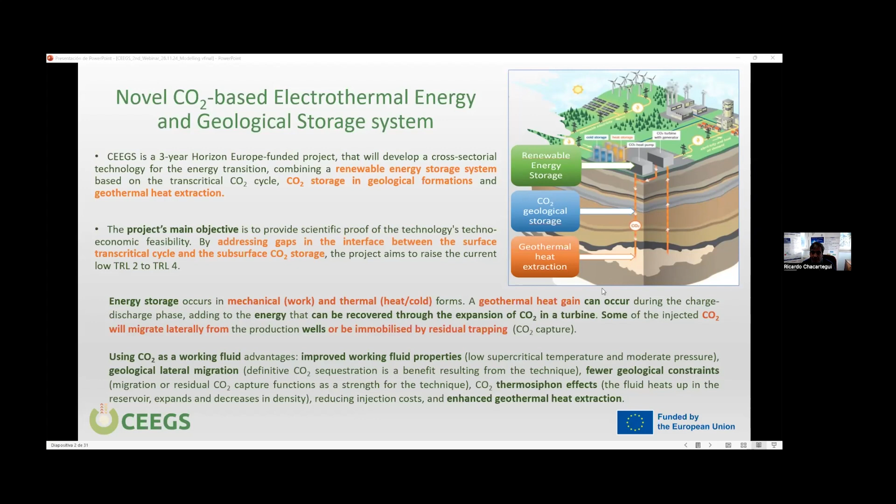The main advantages are related to the very good characteristics of CO2 as working fluid, the capacity of partial sequestration of the CO2 in the terrain, an additional benefit of using captured CO2, and the thermodynamic characteristics of CO2 can also provide benefits regarding CO2 thermosiphon effects, reducing injection costs and big advantages regarding enhanced geothermal heat extraction. Next slide, please.

Our goal in this project is to demonstrate the feasibility of the concept. We are studying different layouts, different integration, and analyzing the different components at this early stage technology. We are not developing the final design of the heat exchangers or turbomachinery, but analyzing if under the proposed cycles there are feasible turbines, compressors and heat exchangers that can be constructed, operated and integrated in the final idea. We are doing this analysis through modeling, which is the objective of today's webinar.

Our focus in the project is the interface between the surface components and the subsurface. It's a novel concept that integrates thermoelectric energy storage based on reversible transcritical CO2 cycles, with the potential for geological CO2 storage. It's a scalable system with high performance, high capacity energy storage, as demonstrated in the previous 2 years of the project. The concept minimizes cost and surface impact and increases the energy storage capacity compared to the Carnot battery without the geological side.

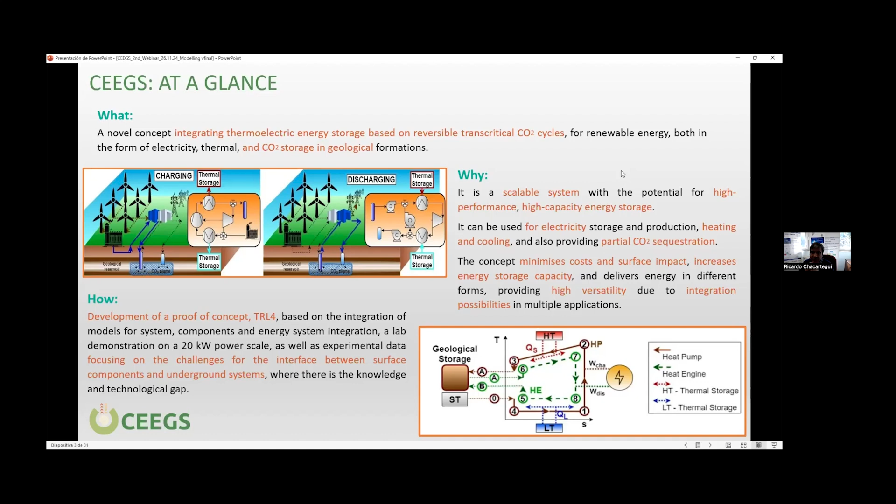Now we are finalizing the second year, so we have 1 year ahead. At this stage, we can say that all the concepts and all the analysis that we have done show that the concept is feasible and viable, and high efficiencies are expected, higher than the Carnot battery standalone. We are having very interesting results with novel designs of the concept and showing the feasibility of the components that

are integrated. We expect to have in the future a second project to increase the technology readiness level towards commercialization. Okay, that's all from my side.

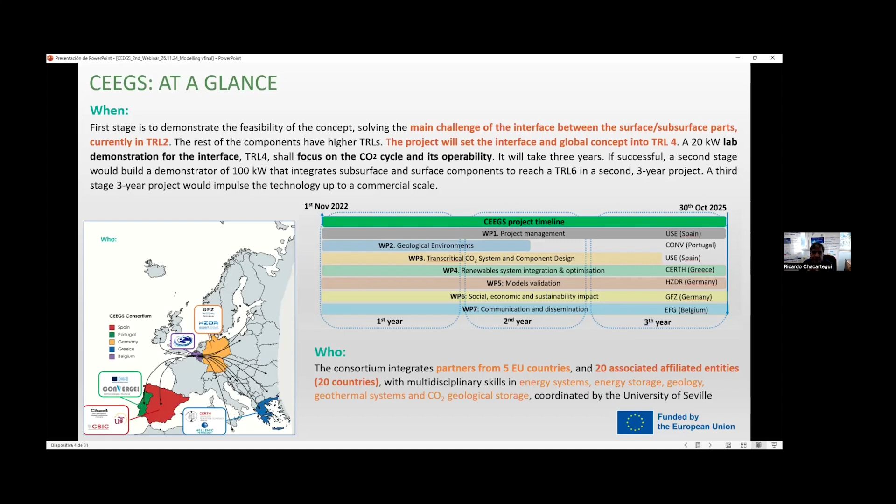Okay, so no, sorry, not all, I forgot. Which are the expected results and impact that we have in this project? We have 3 main blocks regarding the challenges. A challenge regarding the integration of surface and subsurface components into a system. A challenge related to the conceptual design of novel components adapted to the requirements of the cycle.

And the third big block challenge is the techno-economic feasibility and related impacts. It also includes the social acceptability and acceptance of the technology. And that's all from my side.

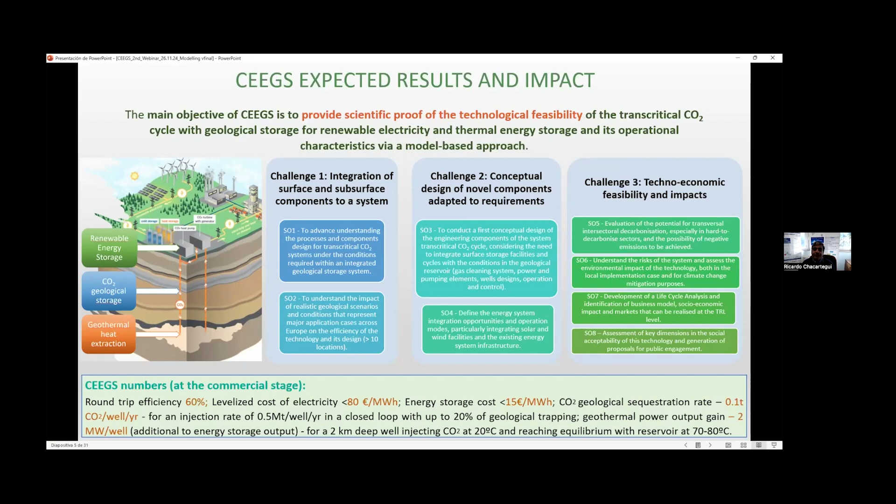Thank you. Now, Andres, I give the room to you. Ricardo, thank you very much for this short overview of the project. Before I pass it on to Andres, I would just like to shortly introduce him because he's also quite an excellent expert in geothermal modeling.

Andres studied industrial engineering and concluded his bachelor's 5 years ago, and just last year received his PhD in energy, chemical, and environmental engineering at the University of Seville. He's also currently employed there, working as a research and development engineer in thermal engines and machines in the group that Ricardo is leading, in the Department of Energy Engineering at the same university.

His main research contributions focus on sustainable energy storage using systems based on abundant and sustainable materials. He is actually the reason why we are all here, because he was the first author of the first publication in this field that we are researching further with CEEGS. Let's say that he's one of the fathers of the CEEGS project. So thank you for that, Andres.

And the next several minutes are yours. Please dive us into the numerical modeling of the CEEGS system. Please. Okay, thank you, Marco, for the presentation. I'm going to present now the first part of the numerical modeling.

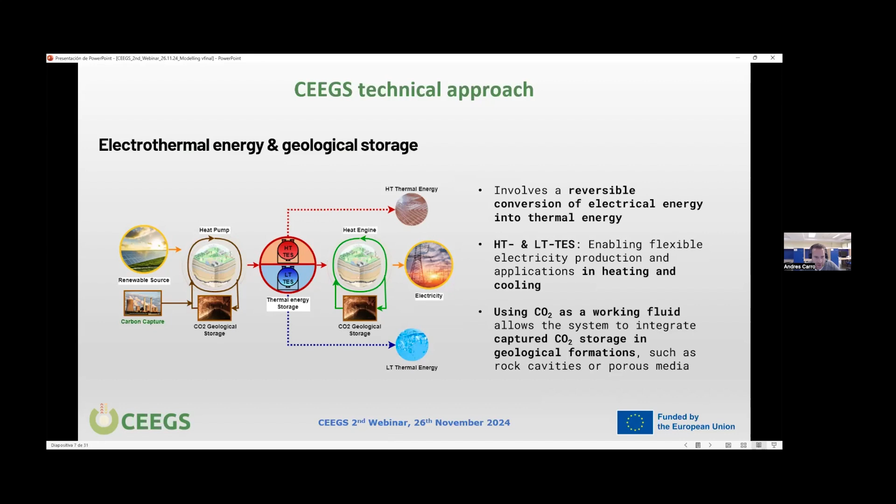In addition, using CO2 as the working fluid in the energy conversion cycle allows the integration of carbon capture and storage processes. The technology employs transcritical CO2 cycles in thermal energy conversion processes. Both the heat pump cycle and the power production cycle involve a compression and expansion process, heating or cooling under supercritical conditions, and a phase change.

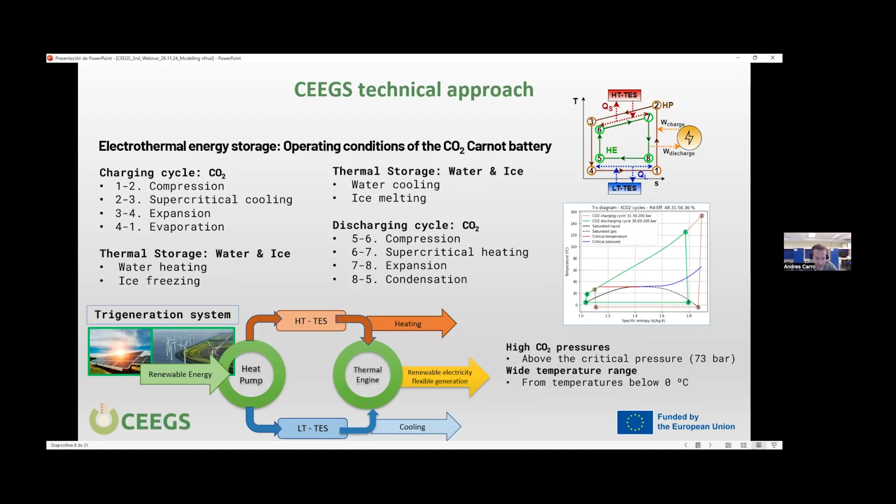The high temperature thermal energy storage system is integrated by sensible heat transfer with heating or cooling of CO2 under supercritical conditions. The temperature range of the CO2 in supercritical conditions allows for the use of hot water as a high temperature thermal storage system. The low temperature thermal energy storage is integrated by latent heat transfer in the CO2 phase change. The CO2 phase change enables the integration of the water to ice phase change as a low temperature thermal storage system.

These conditions of CO2 availability at high pressure levels and relatively low temperatures allow for the integration of geological CO2 storage processes. When considering CO2 capture, transport and storage processes, high pressure and low temperature conditions are compatible with both the supercritical transport and the pressure and temperature requirements for geological injection at the wellhead. Using the CEEGS system, CO2 can be conditioned for injection into underground geological formations without the need for additional energy input.

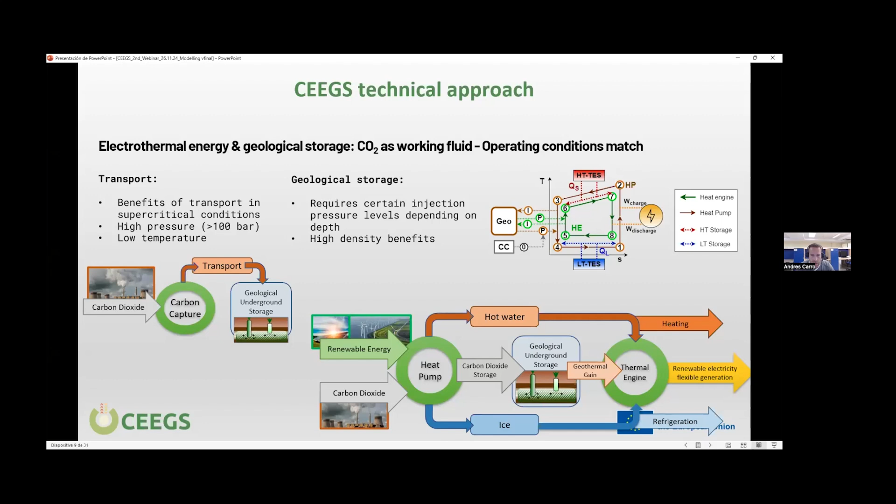The modeling of the system will depend on the processes shown below: a charging and discharging phase, each associated with a transcritical CO2 cycle and heat transfer to high and low temperature thermal storage, and the integration of the geological process of CO2 production and injection from the underground reservoir. By integrating the geological processes into the renewable energy storage system, additional benefits are incorporated, such as a geothermal gain, the lateral migration, or the residual trapping of CO2, causing a portion of the stored CO2 to become permanently fixed.

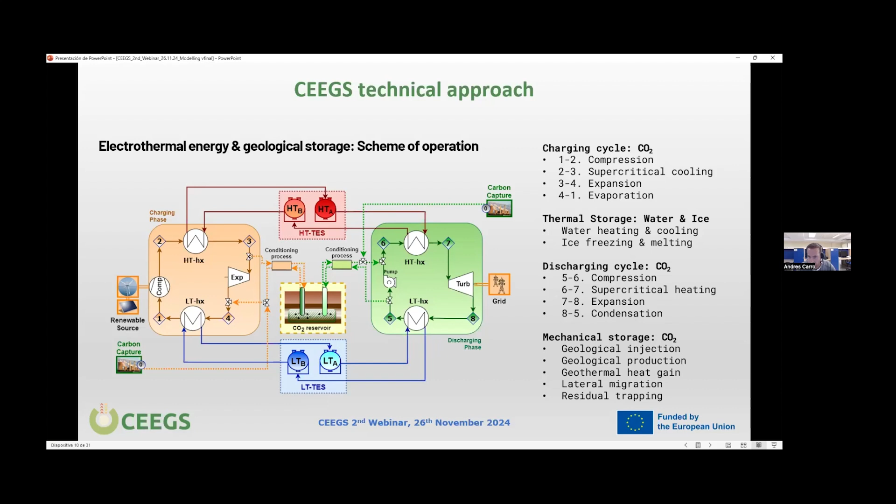The processes involved in energy conversion depend on the modeling parameters shown in the table. Low temperature thermal storage depends on the phase change temperature. The temperature range of high temperature thermal storage depends on the output conditions of the charging phase compressor and the discharging phase pump, which depend on the CO2 pressure on the high temperature side. The power equipment is modeled from the isentropic performance of the equipment. In addition, compressor and turbine curves have been introduced in the modeling of part load operation, as well as a step heat transfer at the heat exchangers.

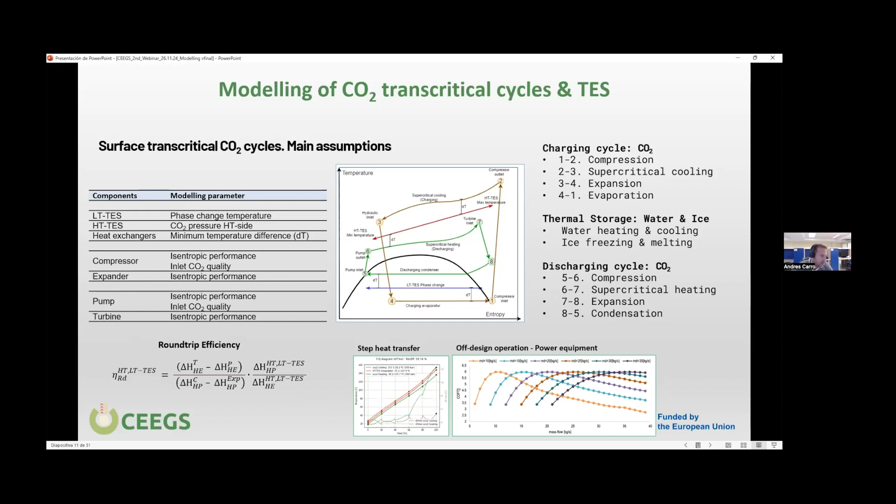The round-trip efficiency of the system is calculated considering that all energy stored during the charging is used for discharging, so that the indicator only depends on the enthalpy drops in the main equipment involved in the CO2 transcritical cycles. The good integration of the temperature profiles in the heat exchange is essential to achieve a high system efficiency.

In the case of low temperature thermal storage, the phase change temperature is conditioning the CO2 evaporation and condensation processes. Evaporation in the charging phase has to be at a lower temperature than the phase change, while condensation in the discharging phase has to be at higher temperature. The CO2 condensation process has to be at a pressure higher than the evaporation pressure.

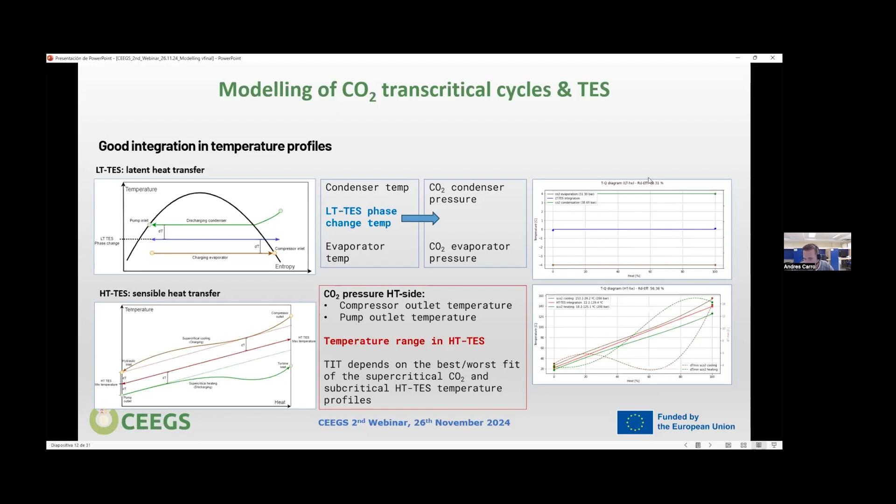In the case of the high temperature thermal storage, the temperature range is conditioned by the outlet conditions of the compressor equipment. The compressor outlet temperature is the highest temperature of the system, so the turbine inlet temperature will depend on this value and on the better or worse integration of the temperature profiles between the supercritical CO2 cycles and the thermal storage.

In terms of modeling the geological processes, the conditions in the reservoir depend on the type of reservoir, rock cavities or porous media. The depth of the reservoir and the ground conditions, such as the geothermal gradient, are conditioning the CO2 in the reservoir. CO2 injection and production processes are modeled using the adapted salt cavity model of Khaledi et al. and the wellbore flow model of Adams et al. This incorporates the simulation of heat transfer and pressure evolution, dividing the well into segments, which depends on several parameters such as diameter, depth, ground temperature, wellbore materials, or pressure losses.

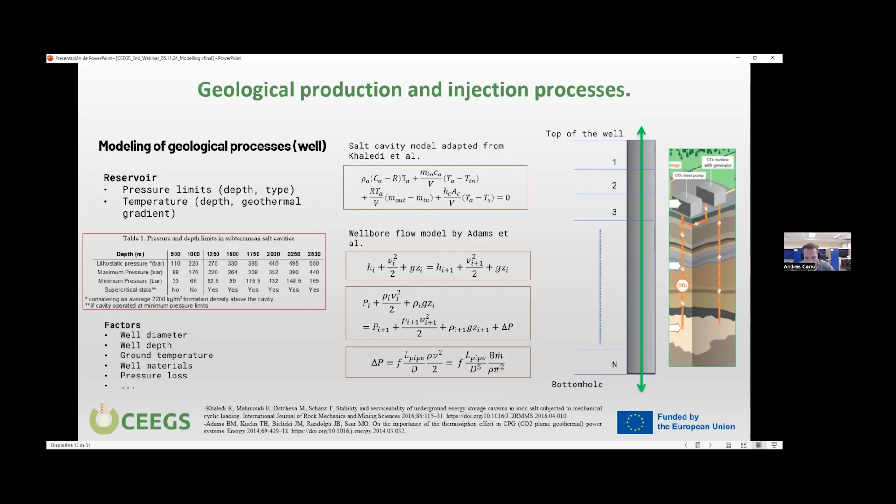The numerical model offers a multitude of results and a wider range of analysis: the optimized coupling of phase change on the low temperature side, and optimized integration of the CO2 cooling and subcritical water heating and cooling. The heating and cooling applications have been analyzed, considering multi-stage heating and cooling or the phase change temperature management. An evaluation of the CO2 pressure range that maximizes the efficiency has been performed, the evaluation of pressure and temperature conditions in the carbon dioxide injection and production, or more detailed studies, such as the preliminary evaluation of seasonal energy and CO2 geological storage, or different configurations of the cycle, adding multi-stage compression, heat recovery, or reheating.

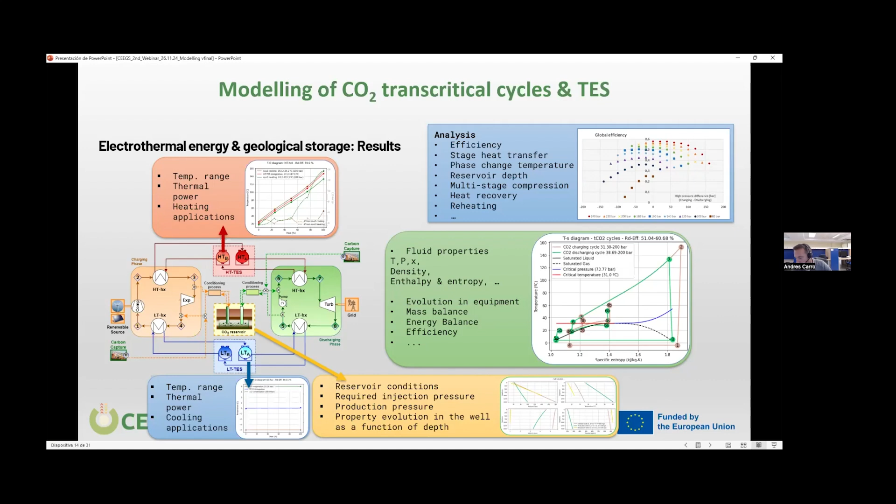As conclusions of this part, the numerical modeling allows the feasibility of the technology to be demonstrated both globally and at the component level. At an early stage of design, the feasibility of integrating the proposed concept is demonstrated. The numerical modeling shows that under certain conditions, heat exchanges are feasible, the evolution of the processes in the power equipment is consistent, and there are possible configurations for the charging and discharging phase, as well as for the integration of components, achieving a high efficiency of over 60%.

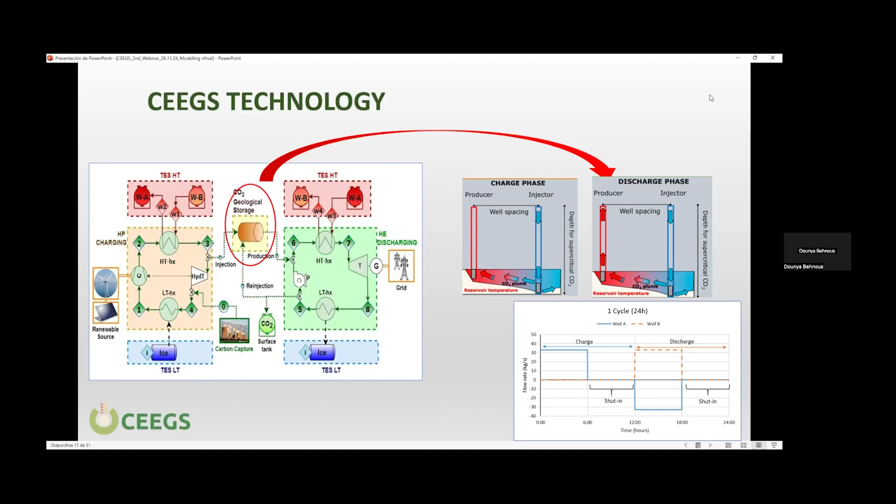However, in this presentation, we will show a case study of the porous media, which is the deep saline aquifer. This scenario presents several advantages, mainly that it is a very good candidate to manage pressure in the subsurface and underground, unlike closed boundary aquifers, which usually lead to bottom hole pressure that can increase during plume buildup, potentially causing fractures and breaking the cap rock.

Additionally, compared to the depleted reservoir field, the open boundary saline aquifer has further advantages, because depleted hydrocarbon fields are known to contain residual hydrocarbons or natural gas, which can contaminate the CO2 plume and pose a challenge to surface facilities that are not typically designed to handle such flammable gas.

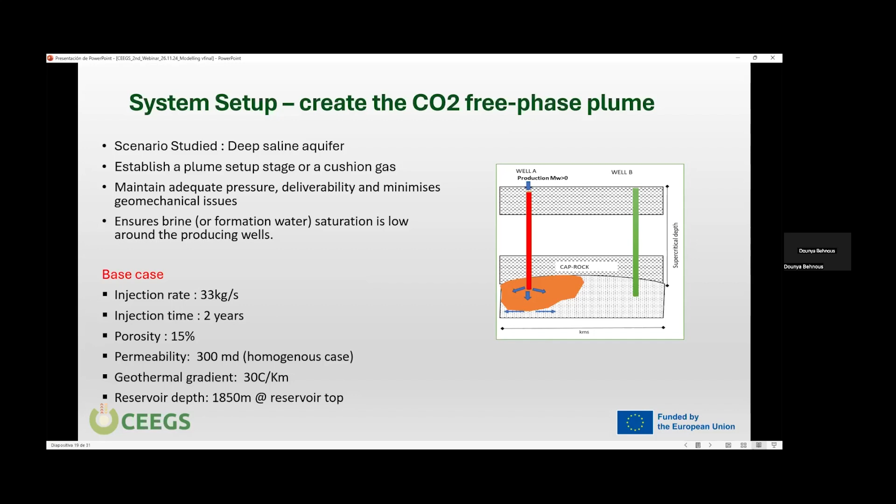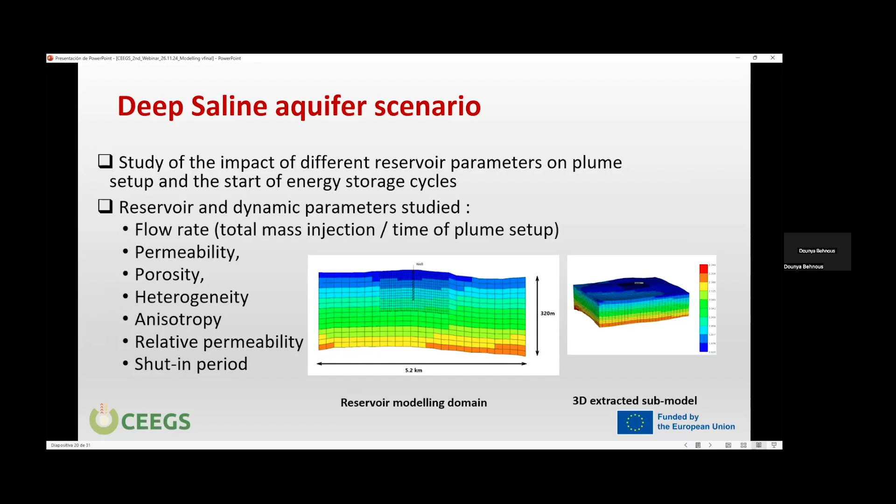So we have studied some parameters such as the flow rate, the permeability, the porosity, heterogeneity, anisotropy, relative permeability, and shut-in period. I will present some results of 2 or 3 parameters that are mainly important for our output, such as the gas saturation and the water rate production.

Since we know that water is the main impurity that compromises the CO2 purity at the wellhead, and due to the presence of residual water near the well, some water will be co-produced. Here we have a simulation for the effect of CO2 injection rate on the gas saturation and the water rate. We did simulation over 3 parts of the interval perforation: the top of the reservoir, the 2/3, and the full length of the perforation.

We can see that as the CO2 injection rate raises, the gas saturation increases, which will decrease water production during extraction. However, a peak saturation of approximately 76% of gas saturation for a porosity of 5%, and this saturation level does not increase further due to the presence of irreducible water in the reservoir.

Also, under anisotropic conditions, the gas saturation in the top third of the wellbore is slightly lower than it would be under isotropic conditions. This also contributes to an increase in the water production rate in the well that is back produced for the CO2.

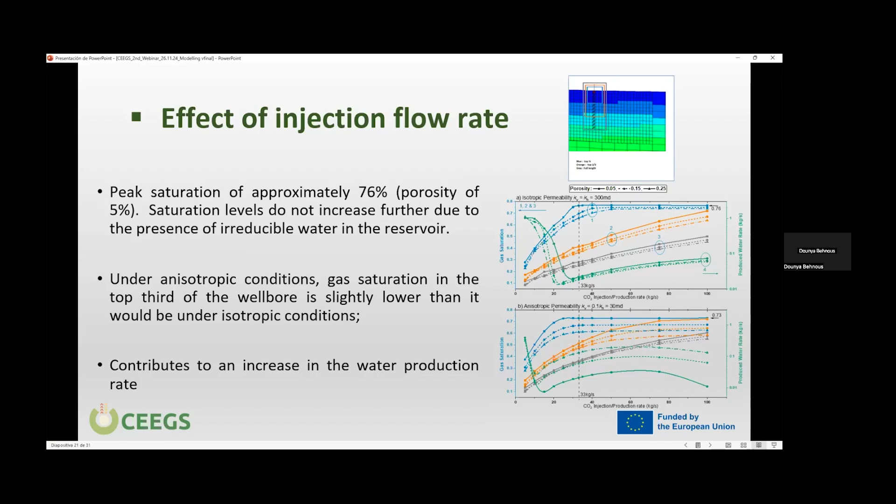The second effect is the porosity and permeability effect on the two main parameters: the horizontal permeability and the vertical, which is the ratio of vertical to horizontal permeability, and porosity. We know that permeability governs the flow of the supercritical CO2 in the reservoir.

The increase or the ratio of the permeability will influence the water production rate during extraction. As expected, the minimum water rate corresponds to a maximum gas saturation. Also, for porosity, it tends to have an inverse relationship with gas saturation—such low porosity enhances gas saturation.

Also, we can conclude from this result that we can establish a range for the permeability so that the minimum water rate is produced with the maximum gas saturation for practical application. The last parameter that we are showing here in the study is the effect of heterogeneity.

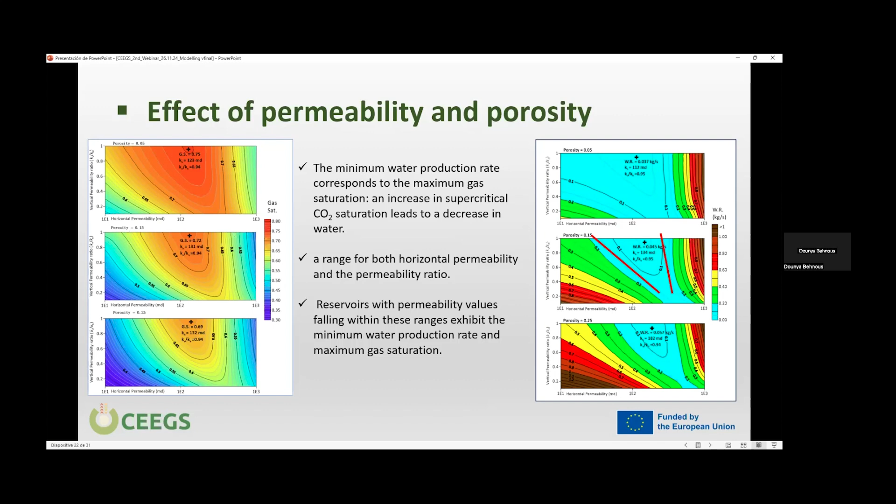It is the parameter that severely affects the shape and the behavior of the CO2 plume during injection. To quantify this effect or the degree of heterogeneity, we have used the coefficient of variation, which is a metric to evaluate heterogeneity, measuring the relative variability of a data set in relation to its mean value. So we have some important outcomes regarding the effect of heterogeneous reservoirs.

A highly heterogeneous reservoir will show significantly lower saturation, with water production rate in the high heterogeneous case over 200 times greater than in a less heterogeneous reservoir.

Also, for reservoirs with coefficient of variation values less than or equal to 0.25, the gas saturation and water production remain relatively stable with minimum variation. Reservoirs with low heterogeneity experience a decline in gas saturation over time, which means we need to avoid a long shut-in period to avoid a decrease in gas saturation.

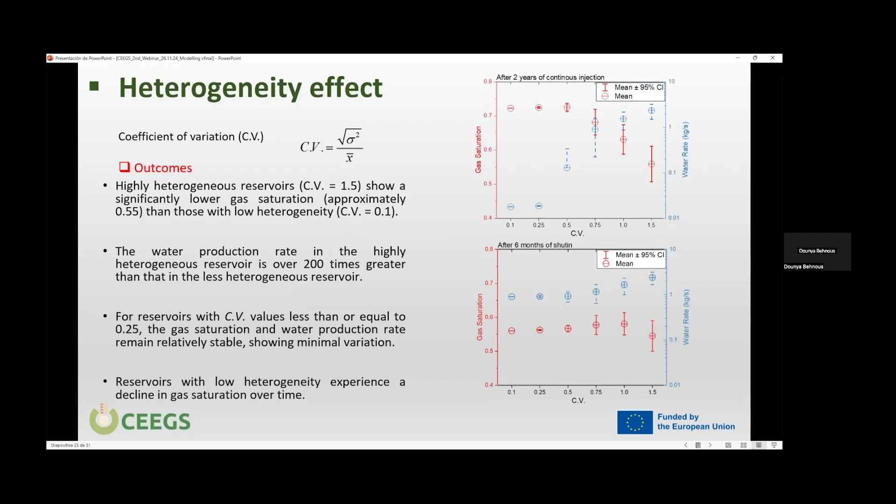As a conclusion for these main parameters that affect the performance of the subsurface reservoir regarding petrophysical properties of porosity and permeability: reservoirs with porosity ranging from 5 to 15% and permeability from 30 to 300 millidarcy are more adequate for the CEEGS concept, which is a variable that needs to be optimized for each specific reservoir. Another reservoir needs another study.

Isotropic reservoirs are always preferable, but the influence of anisotropy is less relevant when porosity is low. However, a high porosity value always negatively impacts gas saturation and water rate. So for a better candidate porous media scenario, it's better to look for a homogeneous reservoir with coefficient of variation less than

0.25, with the impact of permeability on gas saturation. However, for the case of heterogeneous reservoirs, this can be mitigated by the placement or position of the CO2 injection point closer to the top of the reservoir.

In this study, as an important outcome, and as noted by previous authors from other studies, it's preferable to have a gas saturation around 55% as a minimum saturation around the injection well to start the energy storage cycles. Thank you.

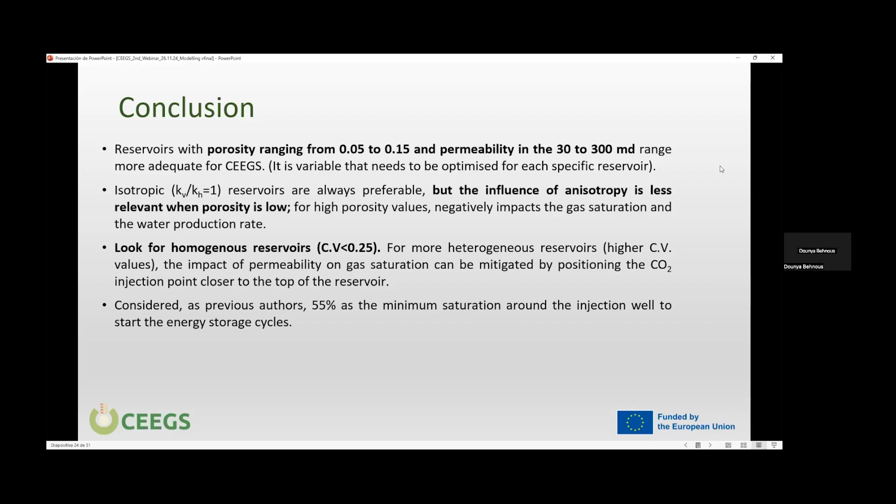Dounya, thanks for this. It was very interesting also to see how we can implement this in the real case scenarios underground, where the future lies, because we want to utilize or apply this technology all over Europe when it's developed well enough. So thanks again.

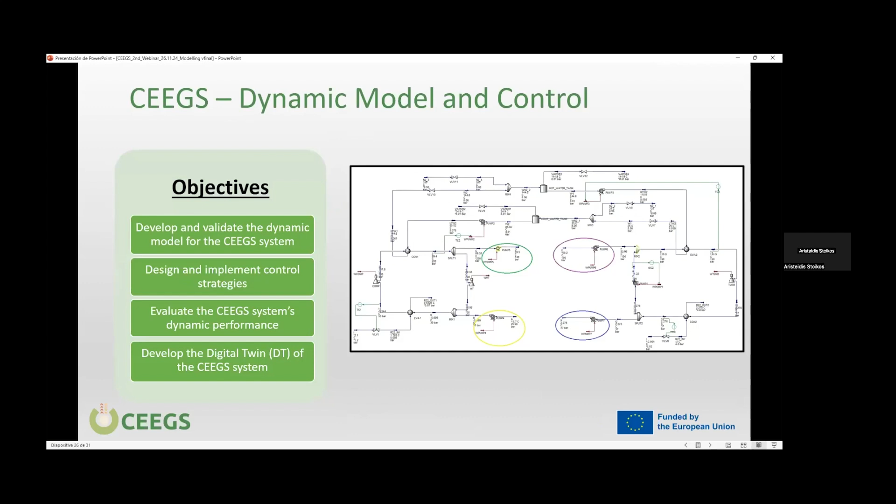So we have developed the dynamic model in Aspen HYSYS for a 1 megawatt capacity. We have been using an operating scenario where initially the charge cycle starts, the hot water tank fills in, and once that has been accomplished, the discharge cycle is activated until the hot water tank is depleted, and then the process starts all over again. This is a base case operating scenario that we have started with, and we have also been using 4 PI-PID controllers at 4 points to control specific temperatures.

Some initial results of this base case scenario: compared to a model without CO2 geological storage, there's improvement in the dissipated energy on the thermal energy storage tanks, and improvement on the overall round trip efficiency, as you can see on the table on the right.

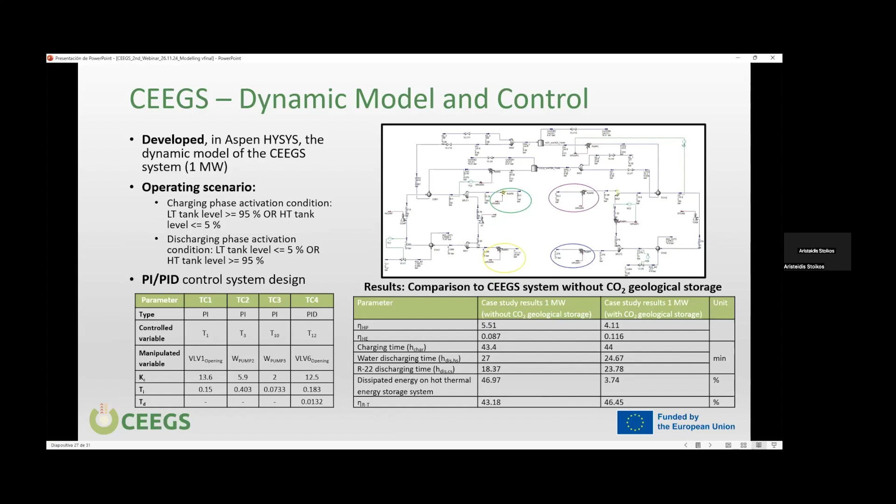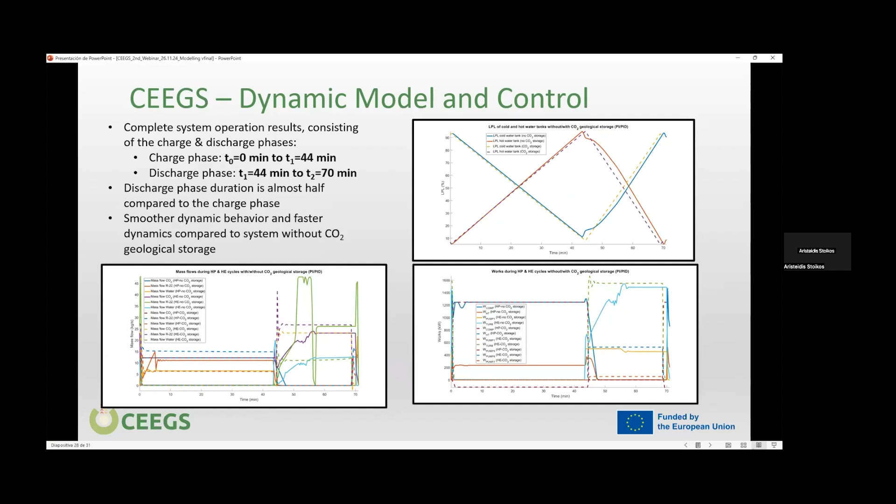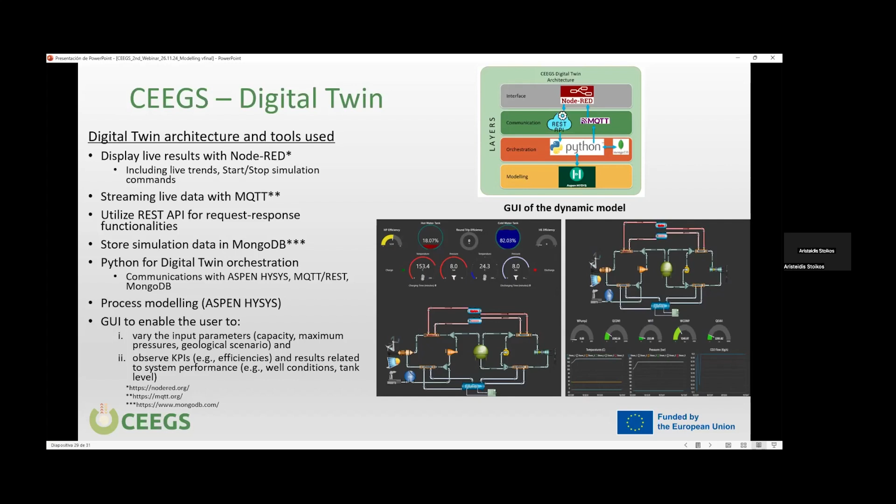To conclude, what the dynamic simulation of the system allows us is to evaluate the dynamic performance, different control algorithms, and system KPIs and critical parameters, while the digital twin allows us for the demonstration and visualization of the overall CEEGS process. In the future, we'll be working on different operating scenarios because, as I said, we have just worked on some initial base case scenarios, that will integrate different renewable energy systems production profiles, thermal energy storage utilization, and integration of different subsurface storage scenarios. We'll also be working on the dynamic optimization of the overall system to achieve the optimal integration of the different CEEGS subsystems and improve the overall system design.

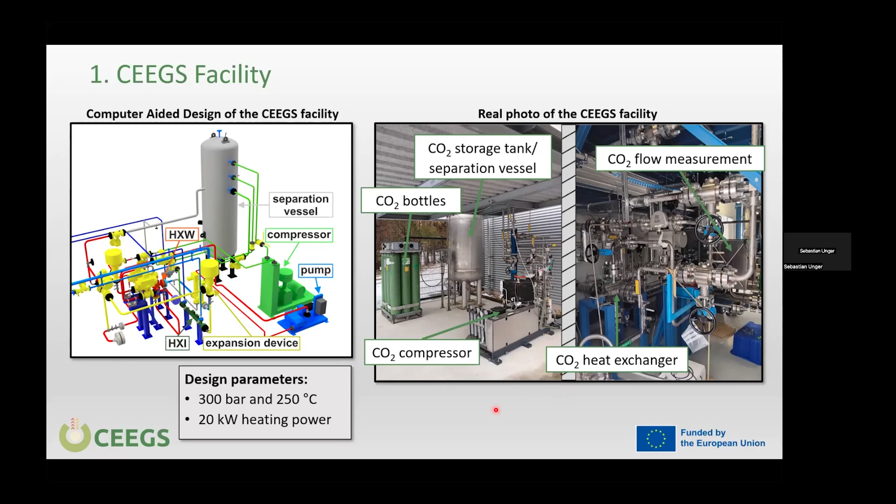Especially if we're having a huge volume of CO2 in the storage tank or separation vessel, it's better to have a bigger volume of CO2 on the outside in case of leakage. And of course, we fill up the system with CO2 bottles. There are also some measurement devices you can see in the background here, flow measurements. And the design is made for 300 bar and 250 degrees Celsius.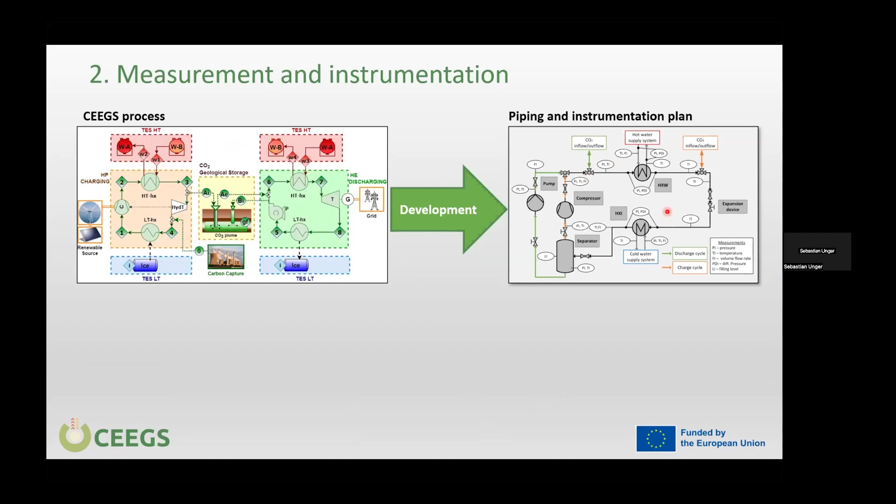So first of all, when you want to build up an experiment and want to determine which measurements you want to have, you look at this concept, which was presented by the partners before, and then you develop a piping and instrumentation plan, and then you determine where all the measurements are, temperature, pressure, and so on. After knowing how many and where to put them, you need to learn what is the reason to have it.

We want to measure temperature, pressures, mass flow rate, and quite often you need fluid properties of the CO2 in our case, and there are fluid or lookup tables. If you know temperature and pressure, then you can know viscosity, density, and other parameters. Then you can calculate the heat transfer, the power, pressure drop, and so on. In the end, you can determine the performance of your system and of individual components involved in the process.

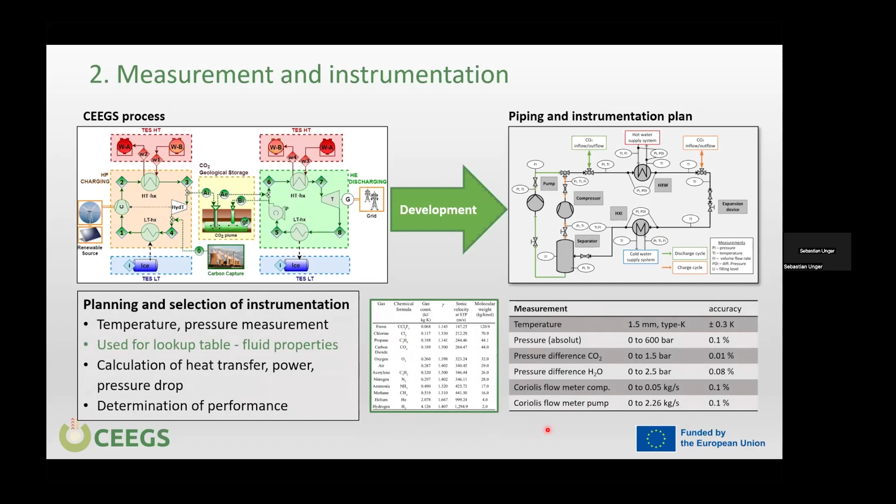Here's a small table of the measurements we take, and I will give you the examples in the next slides. The typical principle of how something is measured is shown here. So for example, you have a temperature sensor measuring a temperature here. You connect that one to a switch cabinet where all the measurements are taken. And then usually you give an electronic signal, usually 4 to 20 milliampere, to a process control system.

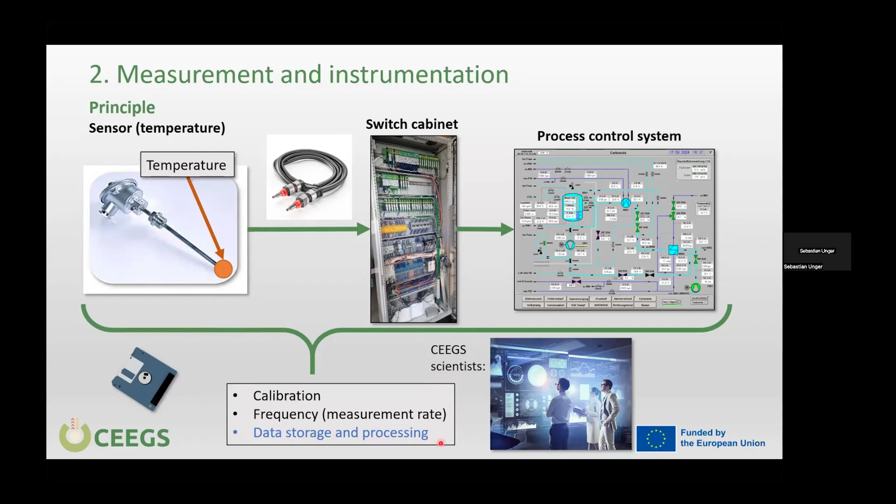There the whole process is controlled, valves are opened and closed. And before you can even measure something, you need to calibrate this whole measurement chain in order to have the correct results. You determine the frequency, so how fast you measure, one measurement per second, one measurement in 5 seconds, or 5 measurements in 1 second, and so on. And then you store and save the data. And in the end, we analyze and process the data, for example for model validation.

One of the most important key process parameters is temperature. Of course, also for safety, you don't want to have too high a temperature. There are many technologies, but two main technologies are used. One is the resistance thermometer. You know that maybe from physics at school, Ohm's law. So from the voltage and the current, you can know the resistance of a sensor. And depending on the material, each has different characteristics. For example, here's a nickel resistance temperature characteristic.

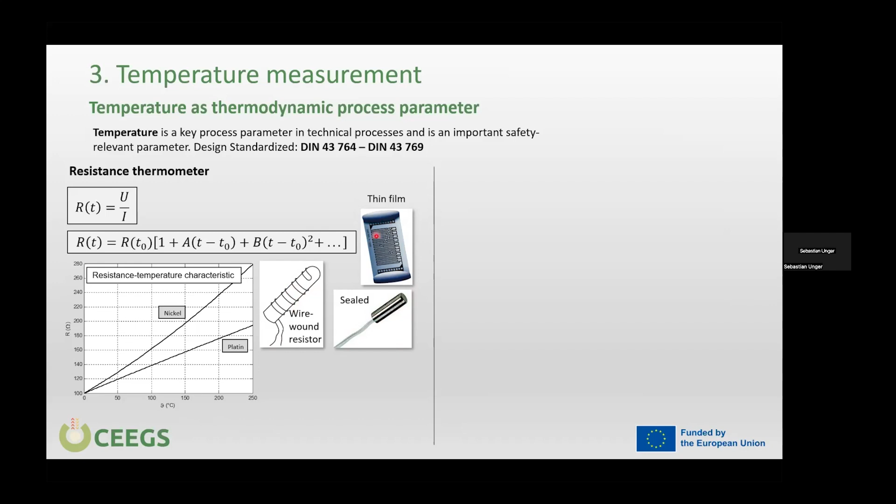So the higher the temperature of this element, the higher is the ohmic resistance, and you can measure that one. There are different designs. Usually there are wires wrapped around something, they're sealed, but there are also these thin film elements where you have really long wires on a surface, and there are even micro applications. That's a measurement in millimeters. You see, really tiny temperature measurements are possible.

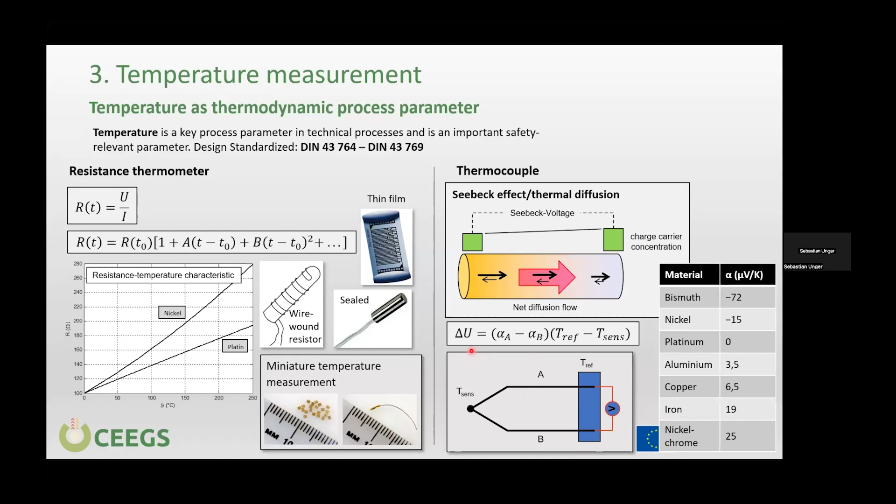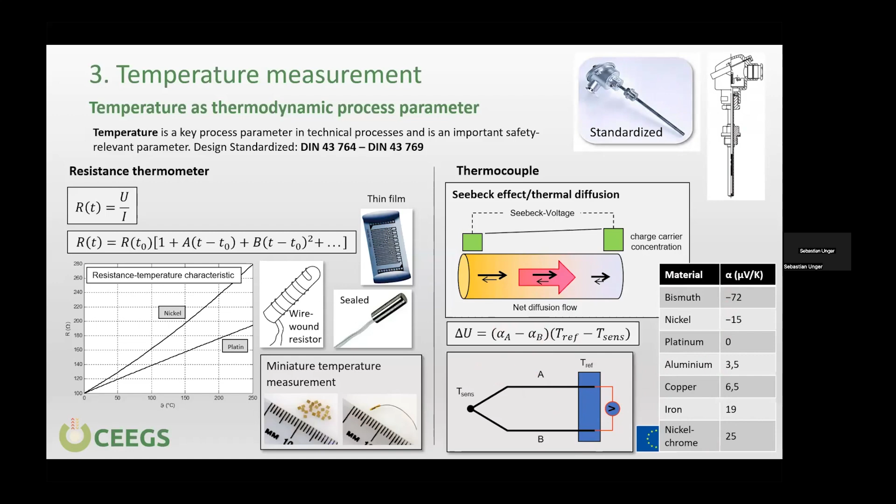The second most used technology is the thermocouple. It's called the Seebeck effect. So whenever you have in a metal, for example, a different temperature in two directions, charge carriers will concentrate in one end. That one is used by having two different materials, the measurement in one location. Then you have a reference temperature, and out of the two different temperatures and the materials, you can know a current, voltage, and then you can determine the temperature. These are the Seebeck coefficients, which are listed for different materials here. All of that is quite standardized, standard components you can buy and install, and after calibration, be used.

The second important measurement is pressure. Pressure is also really important to determine fluid properties and performance of things. Also, if you want to have vacuum, if you are afraid of overpressure, you need to measure that. Again, I will show the two mainly used sensors, which is a capacitive pressure sensor. So you have a certain material in a capacitive location, and depending on the location of this white one, you can know the capacity, and that one can be measured again, or the change of the capacity by the length, and then you know how it is influenced.

Just a small reminder from school, pressure is a force on a surface. So usually you have a force on such a surface. So how does it look? You have, for example, a diaphragm, which receives a certain pressure. Then you have here a reference pressure. And as this pressure is higher, you have a certain movement of that one. And then you can measure the difference in length and the influence on the capacity. Usually they're quite a linear combination, as you see from the formula. So the length changes, or the movement of this diaphragm changes, and then you can measure the capacity.

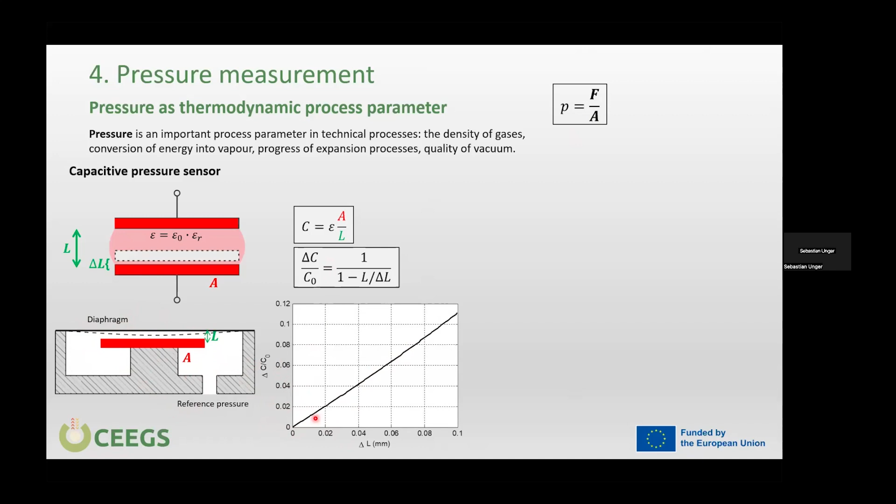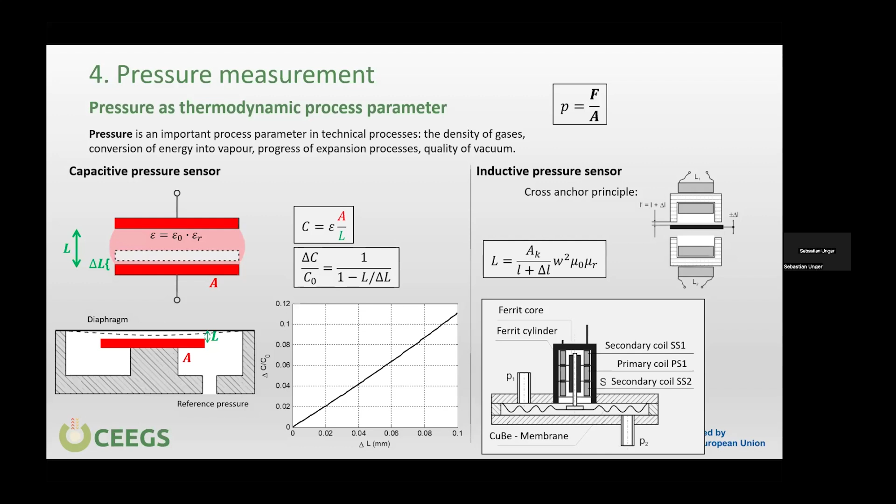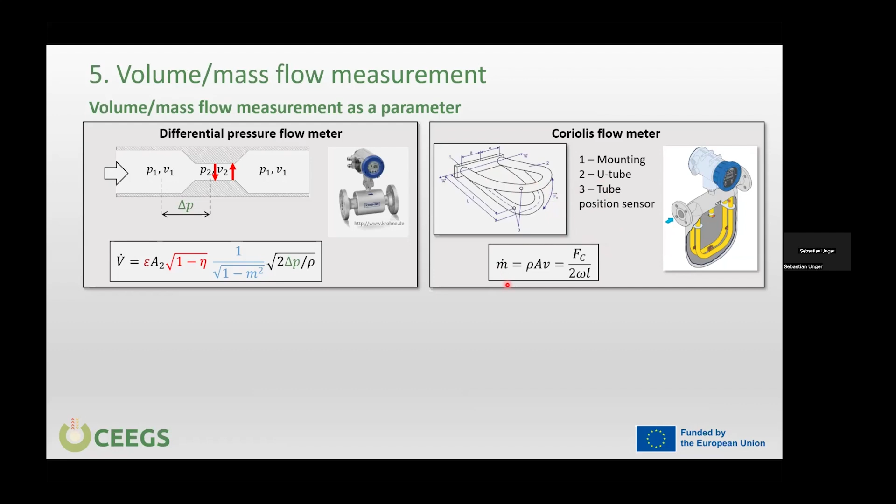The next one is a Coriolis flow meter. So there's a Coriolis force, which means if you have a flow going into a U-shaped tube, you flow in, you flow out, and due to this flow, you have a certain shaking. It's really minimal. It looks really big here, but in reality, steel tubes are only shaking a tiny bit, and this shaking can be measured. So there's a force acting here, and a certain frequency, how fast it swings, and then you can calculate back the mass flow rate. Special about this technology is you directly measure the mass flow rate. For all the other technologies, usually you measure volume flow rate, and you can calculate back to the mass flow rate by density. And that's how it looks in reality.

The next one is a vortex flow meter. So you put a certain object into the flow, and then vortexes are generated. And they give a certain pressure on a measurement. Here you can see it like this on the back end of such an object. You measure the pressure and the force which is acting on this pressure sensor. And from that one, depending again on the geometry of this object, you can calculate the volume flow rate.

Here it really depends on the range you use. There's a dimensionless number called Reynolds number, which depends on the size of a channel and the fluid and so on. And so you can operate that only in a small area of volume flow rates.

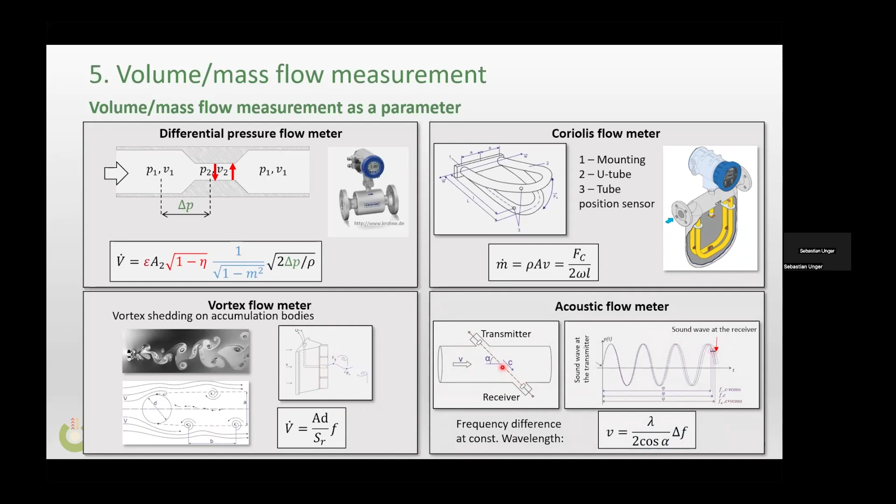The last one I want to show is an acoustic flow meter. So you are using sound waves. You emit them in a certain angle into the flow. Then you have a receiver, and the sound wave goes back to the transmitter. And depending on the flow velocity, the wavelength is changed. So you see here, it's really tiny, the difference, but that's a wavelength at the start and that's a wavelength at the end. And there's a small difference you can see here.

And depending, there are different mathematic formulations how you can calculate it. But for example, with the frequency differential at a constant wavelength, from the difference in the frequency you emit these sound waves, you can calculate the velocity. There are other technologies like magnetic, acoustic things, but I will not go into the details for that. In our project, we are usually using Coriolis flow meters because they're working really, really well with CO2.

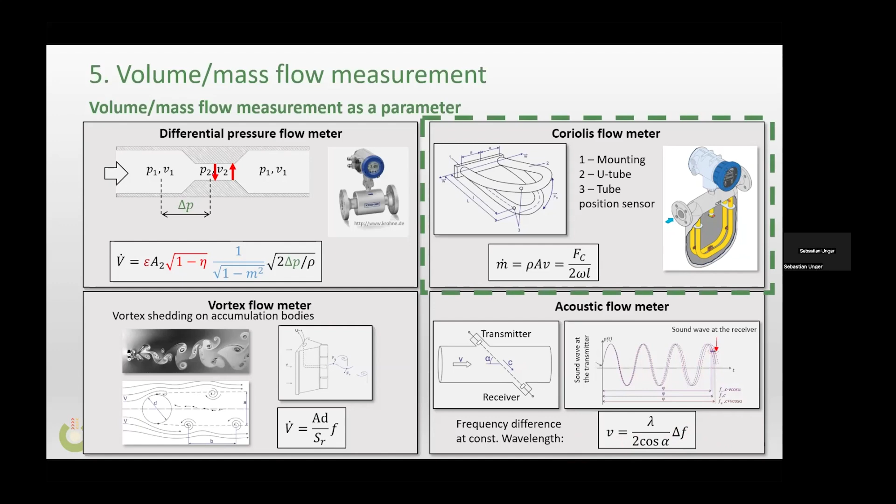And on my last slide, I will give you an example, how a heat exchanger can be characterized or the performance can be determined. That's one of the heat exchangers in the concept. And we have a CO2 flow from the one side to the other side. And in this direction would be hot water flowing, but I will focus on the CO2 flow. And for example, you want to learn what's the pressure drop of the heat exchanger, or you want to know what's the thermal performance of the heat exchanger.

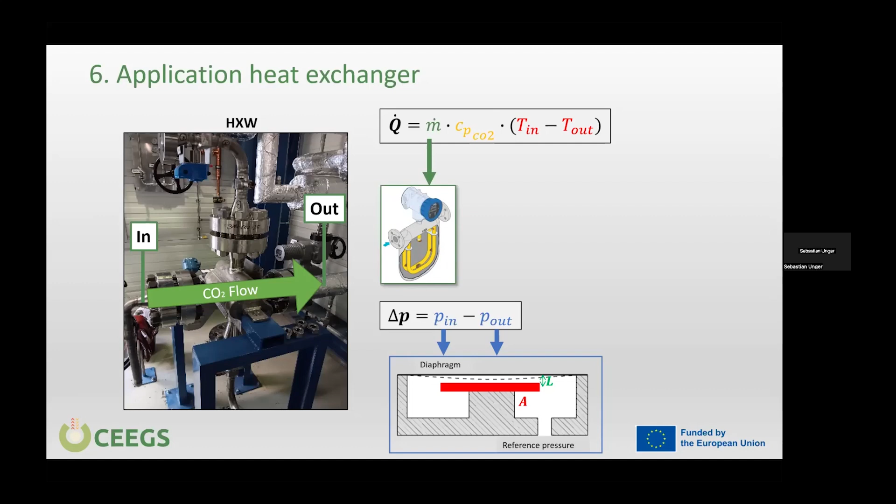For the pressure drop, at the inlet and the outlet you have a pressure sensor, as I was showing before with this diaphragm, for example. That was a capacitive measurement of the pressure drop. For the thermal performance, you would need the mass flow rate, for example, with the Coriolis flow meter. And you would measure the temperature at the inlet and outlet, so you know the temperature difference.

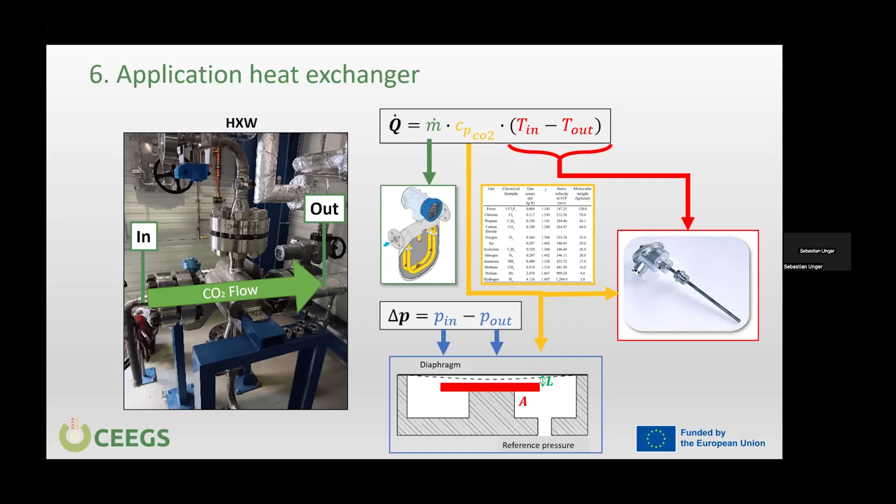And cp, which is the specific heat capacity of CO2, for example, that were the lookup tables I was telling you about before. So you need to know the pressure, you need to know the temperature. And from these two, you can know what is the specific heat capacity. And then you can calculate, from how much the temperature increases or reduces, what is the heat transferred within this heat exchanger. That's it for my presentation, and I'm happy to answer questions.